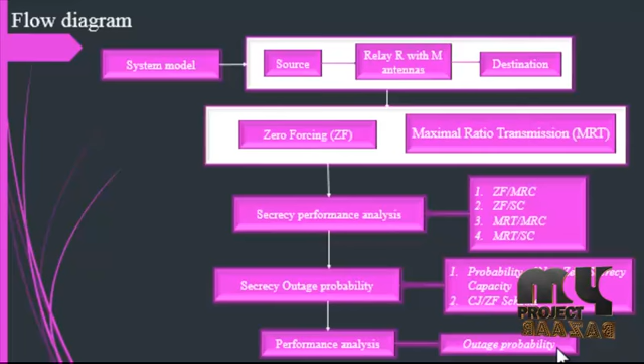So in this paper, finally we get the outage probability analysis for all four schemes, and the secrecy outage performance. So this is the overall system model of this process.

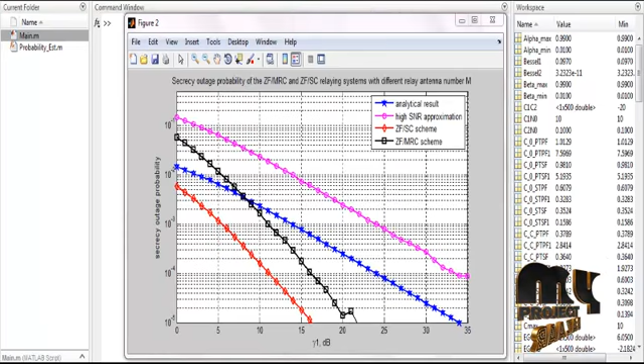In this figure, the secrecy outage probability of the ZF MRC and ZF SC relaying systems with different relay antenna number M. It shows the analytical results and high SNR approximation for the ZF SC and ZF MRC schemes. On the x-axis we consider gamma 1 in dB and the y-axis is secrecy outage probability. ZF is zero forcing and SC is selection combining. Using zero forcing with maximal ratio combining, we calculate the analytical result with the high SNR approximation.

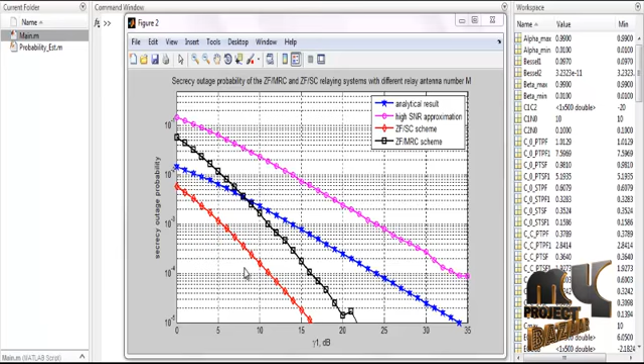So the secrecy outage probability of the ZF MRC and ZF SC relaying systems with different relay antenna numbers. M antennas are used in the proposed scheme. On the x-axis, gamma 1 in dB, which is Eb/N0, the SNR, and the y-axis is the outage probability.

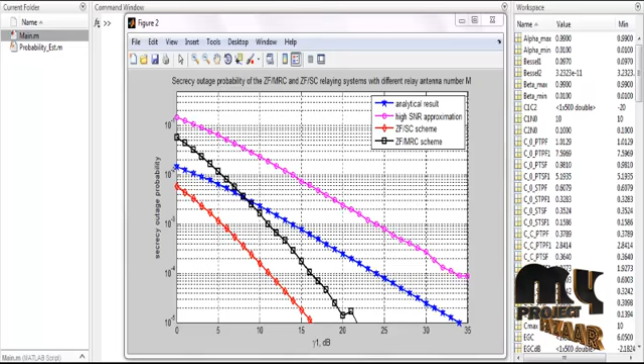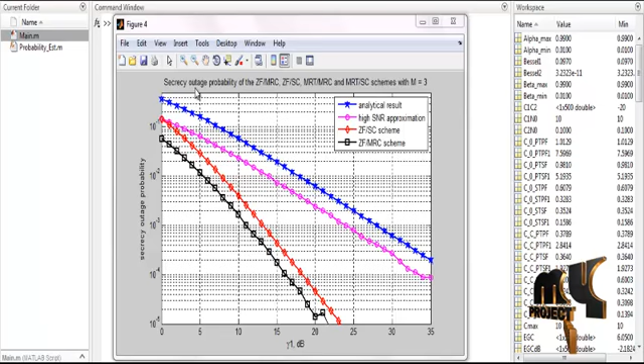This figure follows a similar process: secrecy outage probability of the ZF MRC, ZF SC, MRT MRC and MRT SC schemes with M equal to 3. With M equal to 3 antennas, we get the analytical results and high SNR approximation. The x-axis is gamma 1 in dB and the y-axis is the secrecy outage probability.

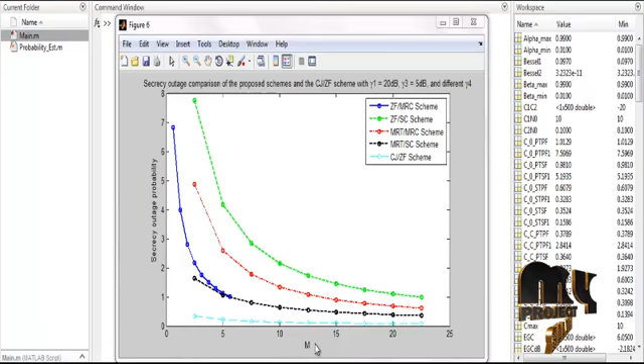In this figure, the secrecy outage comparison of the proposed schemes and the CJ ZF scheme with gamma 1 equal to 20 dB, gamma 3 equal to 5 dB, and different gamma 4 values. There are the four considered schemes, and we added the cooperative jamming zero forcing algorithm, shown in cyan, for secrecy outage probability with M from 0 to 25 antennas. So this is the secrecy outage probability comparison of the proposed schemes with cooperative jamming zero forcing. That is the overall running procedure for the project.